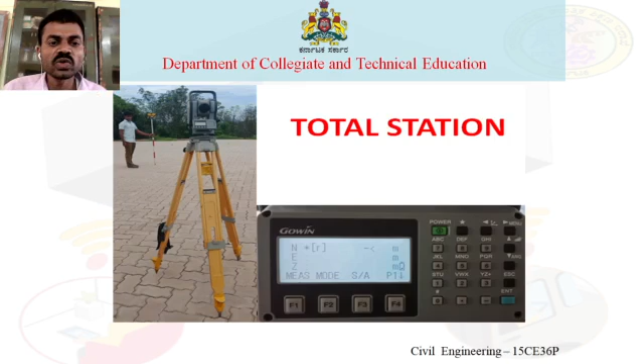The figure shows a total station placed on a tripod stand. These are the parts of a total station.

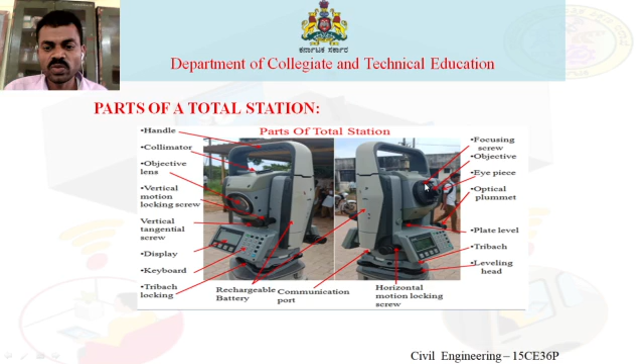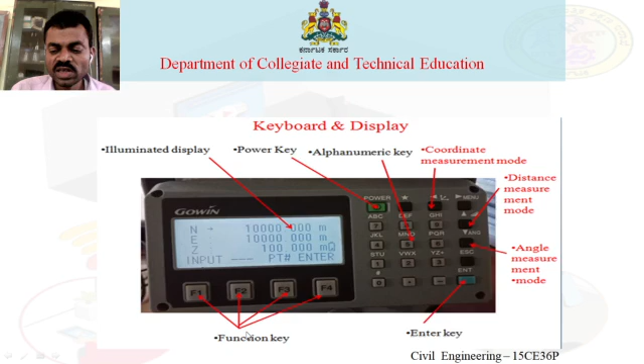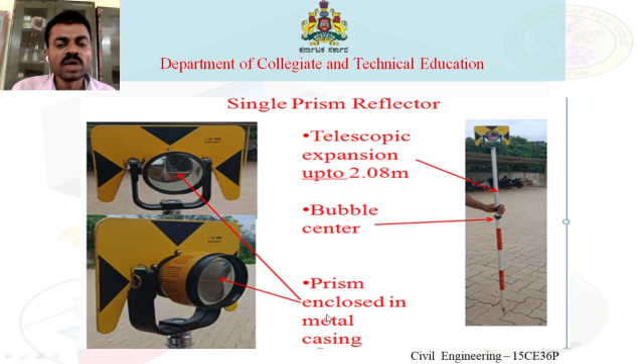The figure shows a single prism reflector consisting of a telescopic expansion up to 2.08 meters, a bubble center portion, and a prism enclosed in a metal casing. Next is leveling the total station.

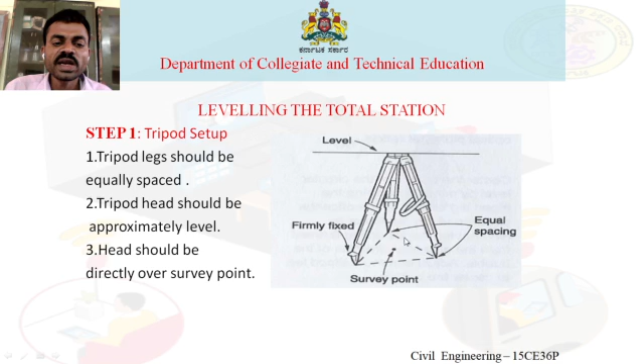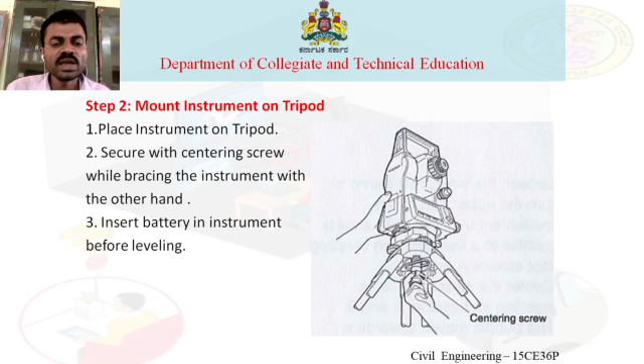Next, insert a battery in the instrument before leveling. Then, focus on the survey point.

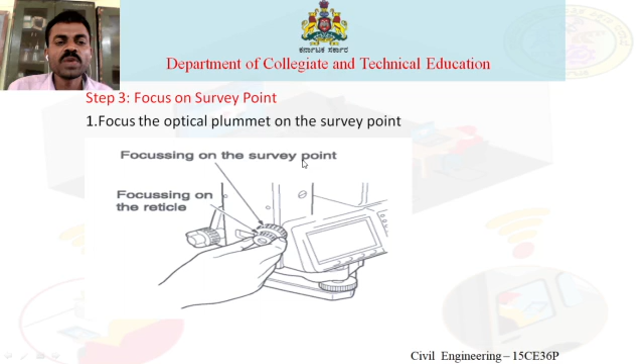Focus the optical plummet on the survey point. Next step, leveling the instrument.

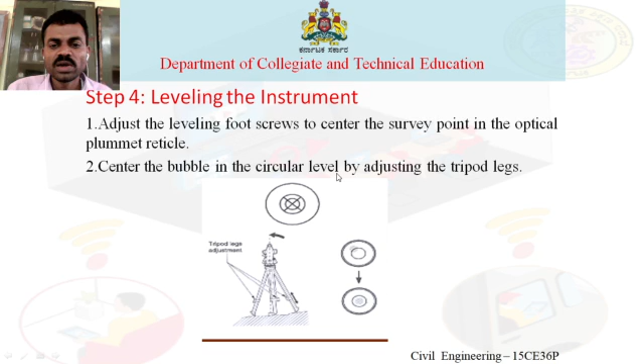Adjust the leveling foot screws to center the survey point in the optical plummet reticle, and center the bubble in the circular level by adjusting the tripod legs.

Next step, leveling: loosen the horizontal clamp and turn the instrument until the plate level is parallel to two of the leveling foot screws. Center the bubble using the leveling screws.

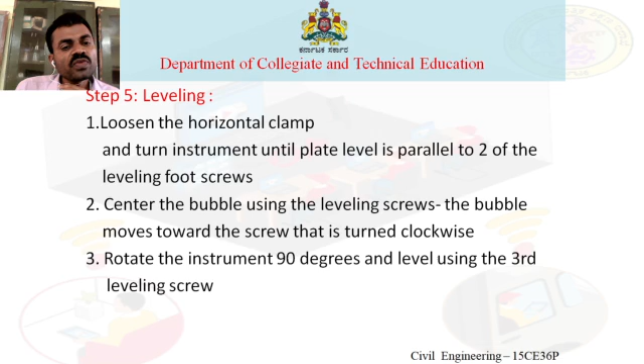The bubble moves toward the screw that is turned clockwise. Rotate the instrument 90 degrees and level using the third leveling screw. So leveling is done as in the case of a transit theodolite.

This is the leveling process: first parallel to two foot screws, then perpendicular to the previous two foot screws.

Make the bubble center by rotating these two foot screws until the bubble comes to the center of the plate level.

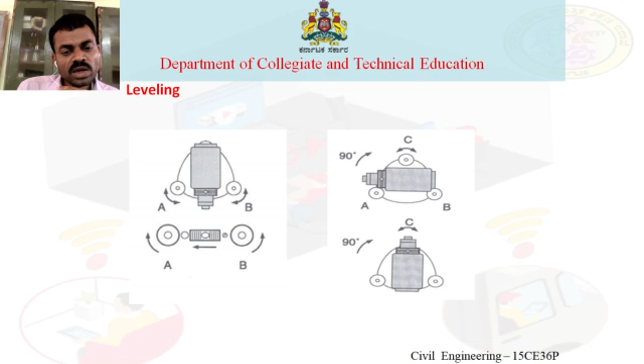Next on leveling, observe the survey point in the optical plummet and center the point by loosening the centering screw and sliding the entire instrument.

Suppose the center of the instrument is not exactly over the center of the survey point; you have to loosen the screw to make the instrument center exactly over the station point.

Afterwards, you have to tighten the centering screw.

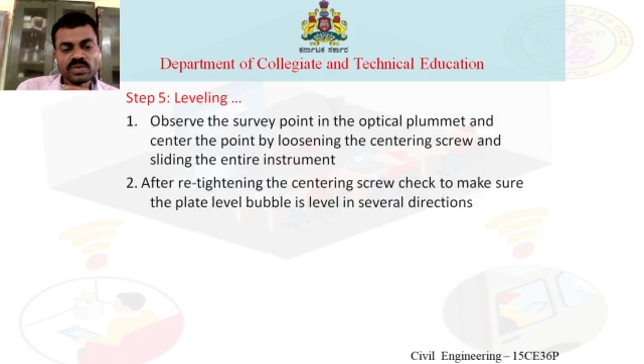To electronically verify leveling, turn on the instrument by pressing and holding the on button. The opening screen will be the MEAS screen.

Select the function and adjust the foot level screws to exactly center the electronic bubble. Rotate the instrument 90 degrees and repeat.

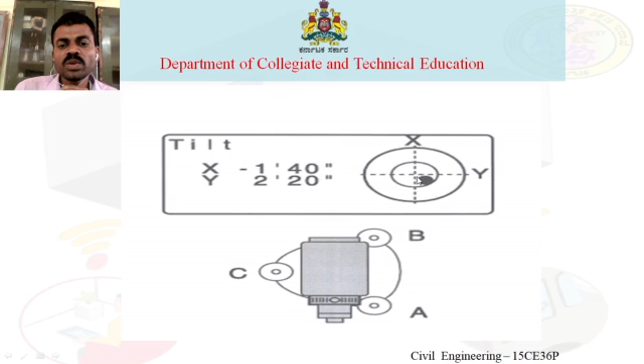So if the bubble is not in the center, you have to use the function keys and adjust the foot level screws to exactly center the electronic bubble.

Adjust image and reticle focus. Release the horizontal and vertical clamps and point the telescope to a featureless light background. Adjust the reticle focus adjustment until the reticle image is sharply focused. Point the telescope to the target and adjust the focus ring until the target is focused. Move your head from side to side to test for image shift.

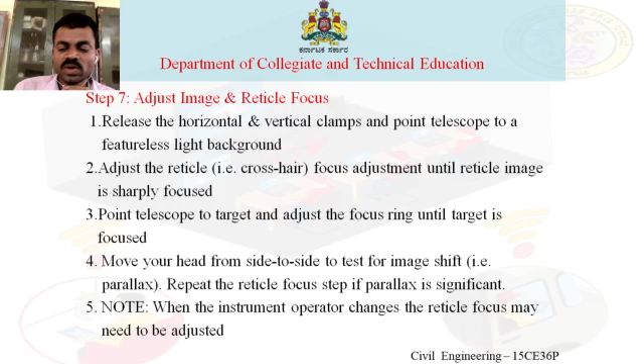Next, we will go for measurement of horizontal angle. After all the temporary adjustments, power on the total station and enter into angle measurement mode. This will be the button used for angle measurement mode. Keeping the total station exactly over station O, you have to bisect station point A by keeping a reflector on point A, and press the set 0 button, and the horizontal angle will be set to 0 degrees, 0 minutes and 0 seconds.

Release the motion locking screws. Rotate the telescope in the horizontal plane and bisect point B. The required angle will be reflected on this display board with a least count of 1 second. Now the horizontal reading is 300 degrees, 47 minutes and 18 seconds. Vertical reading is 84 degrees, 50 minutes and 17 seconds.

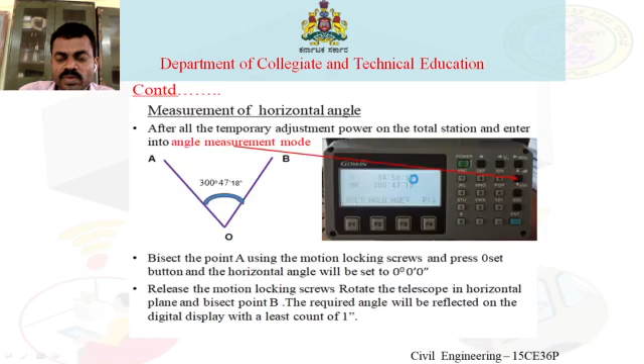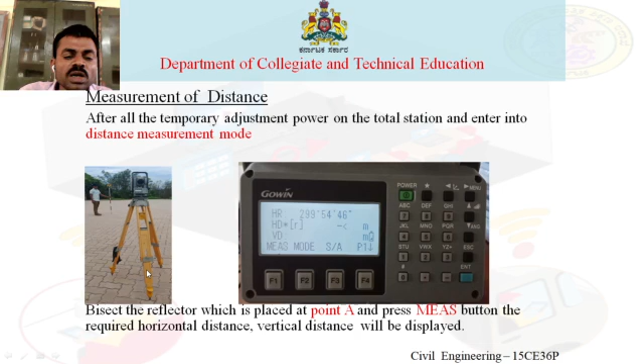Measurement of distance. Bisect a reflector which is placed at point A and press the MEAS button. The required horizontal distance and vertical distance will be displayed. After all the temporary adjustments, press the distance measurement mode button. Bisect the reflector which is placed at point A. Now I am placing a reflector at point A and press the MEAS button. The required horizontal distance, the distance from the survey point to this reflector point, and vertical distance will be displayed.

Measurement of coordinates. Enter into coordinate measurement mode. This will be the button used for measuring the coordinates, that is x, y and z directions. Press the F4 button; F1, F2, F3, F4 are the function keys. It takes you to a new window. Then press OCC and enter reference coordinates.

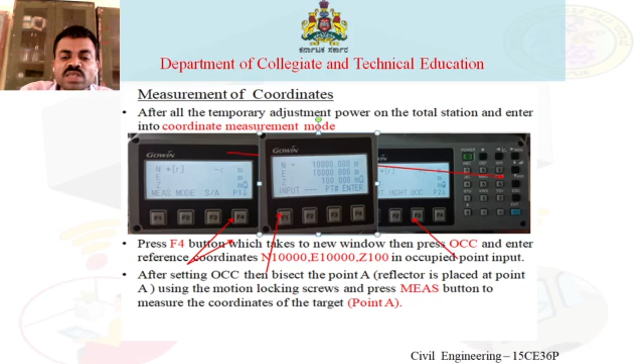Now I will be taking a reference coordinate of 10,000 along the north direction, 10,000 along the east direction, and 100 along the z direction. In occupied point input, after setting OCC, bisect point A using the motion locking screws and press the MEAS button to measure the coordinates of target point A.

Now we will go for multiple choice questions. In total station, data is stored in: A. Pen drive, B. Data card, C. Microprocessor, D. External hardware. Answer C, microprocessor. Vertical angle is measured in the total station as zenith angle. True or false? Answer B, that is true.

When a total station is sighted to the target, which operation acts first? A. Rotation of optical axis, B. Rotation of vertical axis, C. Rotation of horizontal axis, D. Horizontal rotation of line of collimation. Answer A. Which of the following indicates the correct combination of a total station? A. Theodolite, compass, B. Theodolite, EDM, C. Electronic theodolite, EDM, D. EDM, GPS. Answer C, that is electronic theodolite and EDM.

In which direction is it best to place the total station for obtaining the best output? A. East, B. West, C. South, D. North. Answer D, the north direction. The data obtained from a total station can be used directly in which of the following software? A. Primavera, B. Staad Pro, C. Autodesk Revit, D. Surfer. Answer D, Surfer. Thank you.